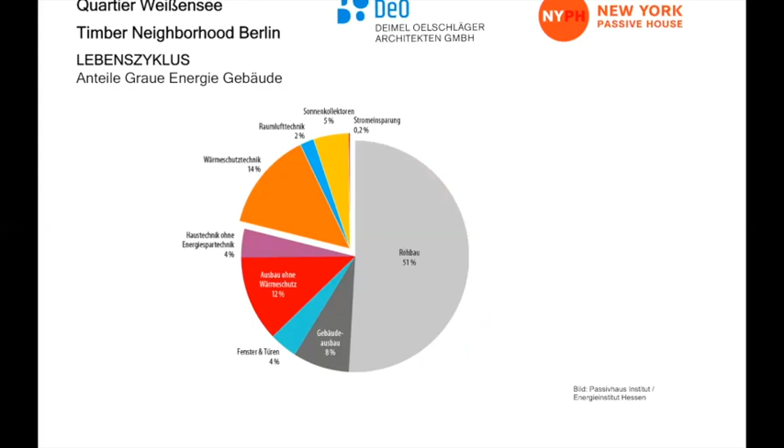And if you look now inside the building, the gray part is the Rohbau. This is the construction, the carrying structure. So from the 50% of the building, we need the embedded energy. Again, 50% is the carrying structure, and the other is divided in insulation, windows, and tech.

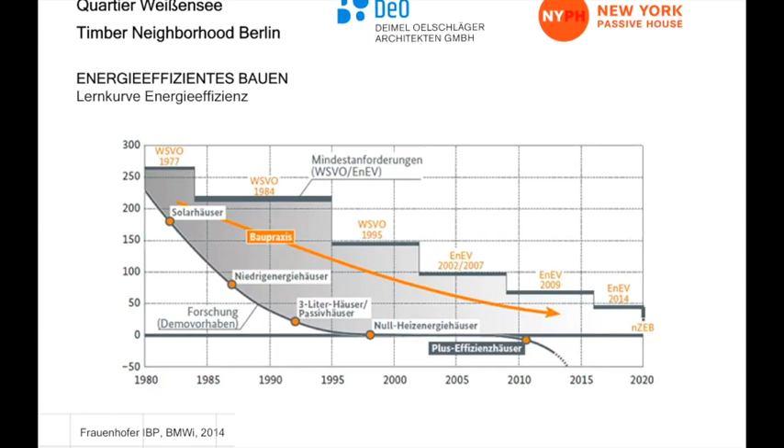And we have good financing for efficient building and very strict laws in Germany. You see on top the step that goes up. This is the law always getting harder from year to year. In the end, all the European countries have to show how they will build zero energy houses. On the other hand, there are research projects like Niedrigenergie, Nullheizenergie, or plus energy houses. And the arrow in the middle shows that building practice, how the buildings are constructed, is exactly in the middle between the law and the so-called Leuchtturmprojekte.

And now we have to bring down our carbon to zero by 2050. We are in 2020. And again, you can see in the middle on the red line, the Gebäudesektor, this is the building sector. This is 40% of the emissions. This is an enormous part, and this is what we're treating as architects or planners.

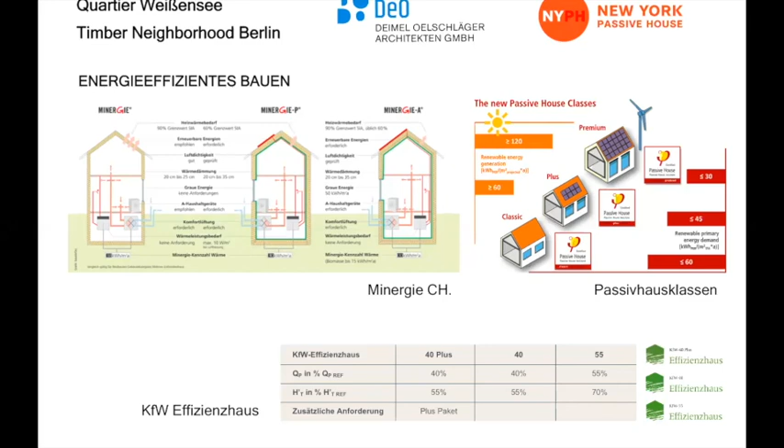And in the middle, Minergie CH, this is Switzerland, they already had a level called gray energy, graue Energie. So if you kept the minimum level of 50 kilowatt hours per square meter a year, you get the best financing if you reach this aim. And this is what we are focusing on now in our work.

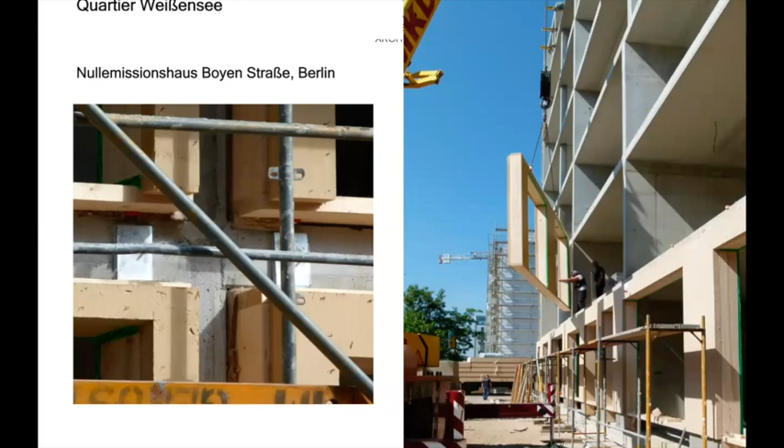And the next level is the first plus energy house we created. This is a Baugruppe, we call it in Germany. These are private investors that start organizing the building process for themselves. And plus energy, in this case, means we had to put solar panels in the facade. This was the first time we did it.

And it also is a wooden construction, which was not really easy because of the fire protection of the solar panel in the wooden facade. You also see this is prefabricated wooden panels filled with cellulose fixed to a concrete construction.

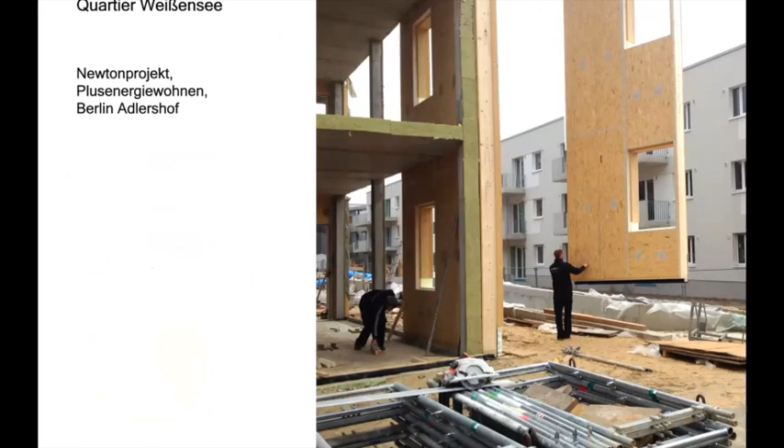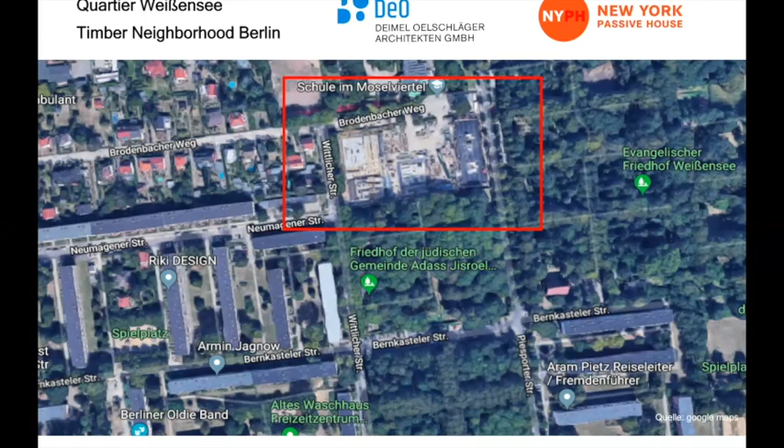And the investor found an old Jewish cemetery that is no longer used. He bought it and got the permission to build there. It was a competition with 10 invited offices, and we were the only one to suggest the wooden construction. So we got the contract to build it.

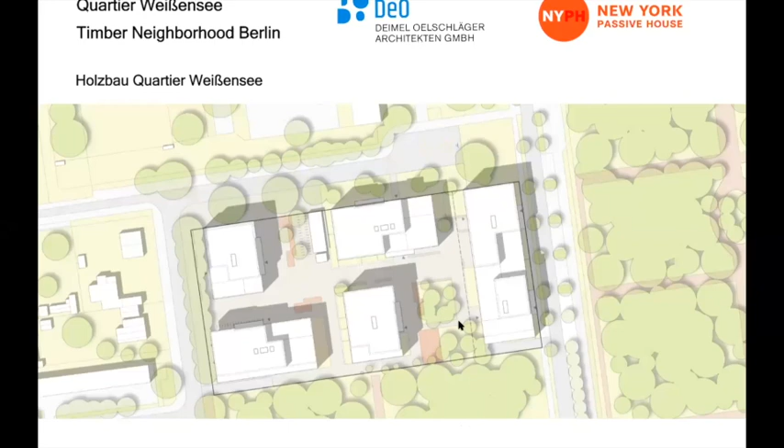And this is mostly the end of the urban development. We built 5 houses. They are between 4 and 5 stories. And 4 of them are for a cooperative, and the other one is, how it's called, self-owned, Eigentumswohnungen. And we built two yards. The first one on the left is an open space with communal services, and the right one is a green area with a playground for children, and it's connected to the rest of the Jewish cemetery. It's a green area.

So these are 2 slides for the facts. How big is it? What are the basic numbers? So we built 12,000 square meters area of use, and it's a mixture between living and open services. This is the KfW level we reached. And the price is quite interesting. This is 2,090 euro per square meter, and in total 24 million euros.

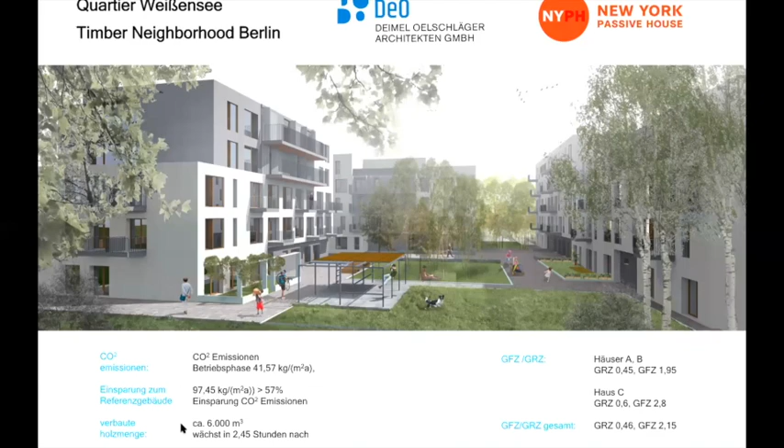And this is the slide for urban density. We suggest to make the houses up to 5 stories, but half of the area is covered with building. This is a GRZ of 0.46. And the whole plot is 2 times covered with Geschossfläche, living area. And this is the condition to minimize to zero emission by the standard KfW 40. So this is apart from the competition we have on the first area. This is what we should build. So the maximum of floor area.

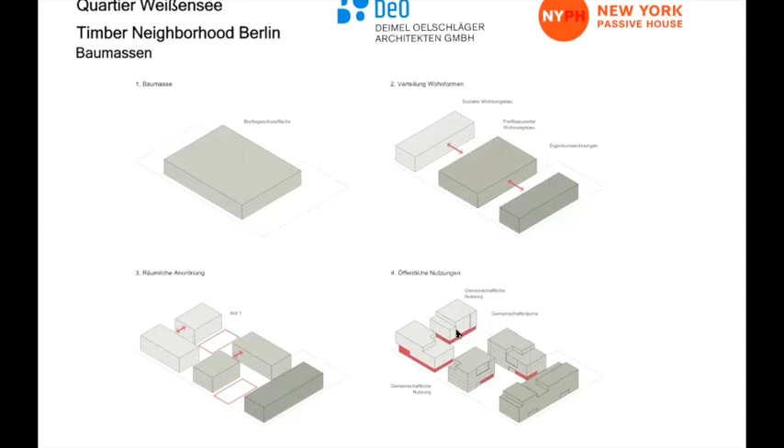And we show the idea, it was almost a third social housing, a third rentable housing, and a third self-owned housing. And the next shows the idea for the urban form, to create these 2 public spaces between. And on the slide, the fourth is the public services, how they are located in this little area. And we put them on the front. This is the most public area with the urban spaces, and the deeper we go in, the more privacy we have.

There are some special features for living. We call it cluster. So this is like minimum apartments together in one flat, and it's for refugees, for example, from Syria. So we have 2 units with refugees. These are young people coming back from drugs, living together with a social worker and so on.

And again, the yellow are the areas where there are social services. We build a pool, a little bar. There's a kindergarten, and the other house has a restaurant. So there is a cooking, mostly a public cooking for all the people that live in this area. The idea is to have communal living in all kinds of living conditions. You are rich, so this is your own flat, and you are depending on social money, so you go to a social housing.

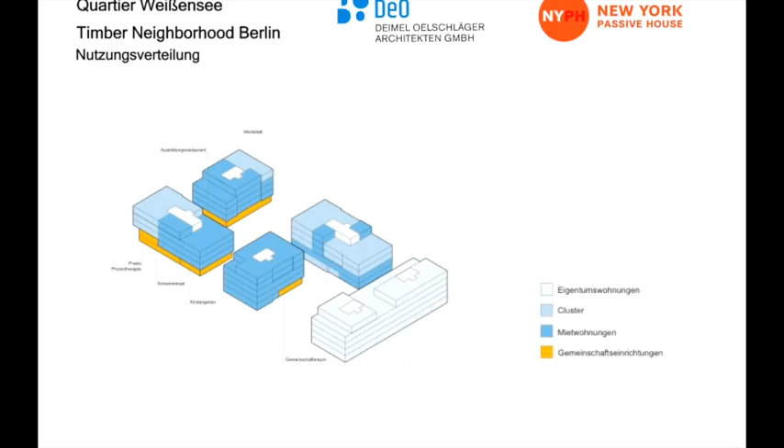This is the plot from the landscaper. Unfortunately, we had a lot of area to cover for the fire services. They have to get to the windows. But the public space with all the services should be the meeting point, and the deeper we go in, the greener it gets.

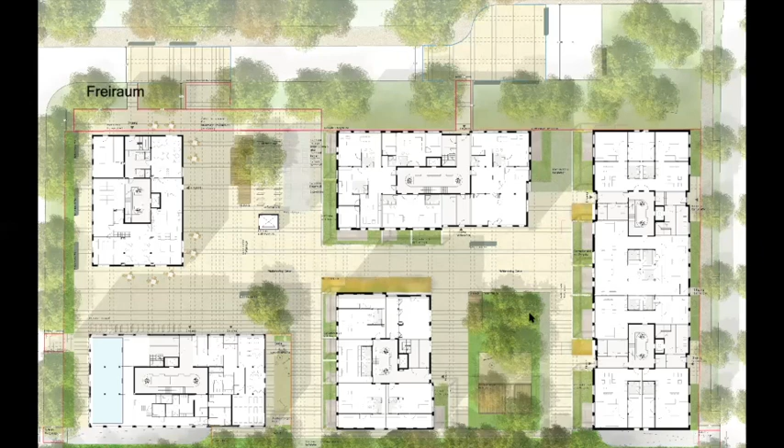This is the mostly finished housing, and you can see the organizing of the single housing. In some places they're very narrow, and this is what we really decided to do: if you have areas where it's very narrow, you meet each other.

That's the concept. A lot of people build community when they meet, and so you go through and get into the open space. There are 2 slides that show the public area around.

This is the playground with the view into the cemetery. This is how you see it from the existing Jewish cemetery into the area.

This is the public area, also with services like rubbish and cycling places for bicycles. And we built 2 garages for cars and 1 garage for bicycles, each with their own lift.

This is the one you see in the background. This is a lift only for bicycles, to go under and put your bicycle into the bicycle garage. And this is the view from the street, the ownership.

So I declared the different systems of housing, and we had to fulfill the task of showing the different types of living in one floor.

On top you see these cluster units. These are small units. They have their own bathroom and the possibility to get a little kitchen inside, but they also have a common space to use for living and cooking.

There's also a possibility for a service unit connected, so the social workers can even have an office there, or sleep there, whatever service they need.

Under this, mostly on the same plot, is a big 5-room rentable area. We decided, because this was the task from the competition, to make the construction like a skeleton. So we have different axes.

One axis is in the facade, which is very narrow, 2.80 meters. And the one inside the house follows the line of the staircase, it's double, 5.60 meters.

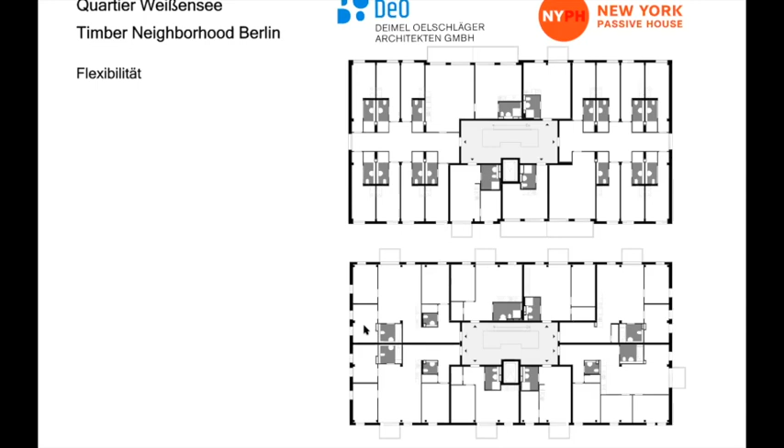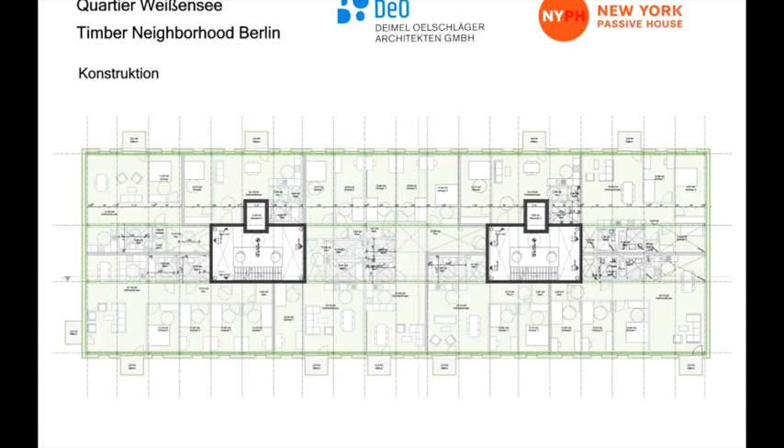So the decision to make a skeleton comes from the need to show, inside the same construction, those different types of living. This shows the basement floor plan of the biggest house: the black lines are the concrete part of the house, and the green is the wooden part.

And if you see it in section, it becomes more clear. This is the garage for cars and private storage, the staircase in concrete is in the middle, and on the staircase the massive timber ceilings are connected.

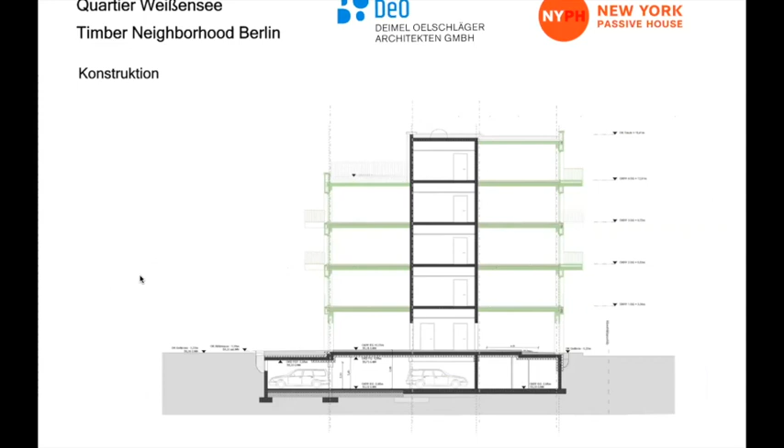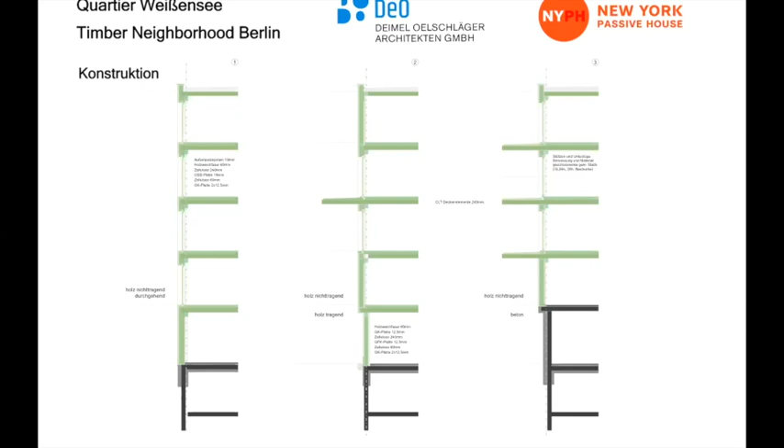So I brought some details to explain again the basic construction. We see the facade panel, which is filled with cellulose and insulation on top, and gets plastered on the outside.

Inside there's a little fire protection, so we had to reach 30 minutes on the facade. So there's insulation, mineral wool, and gypsum.

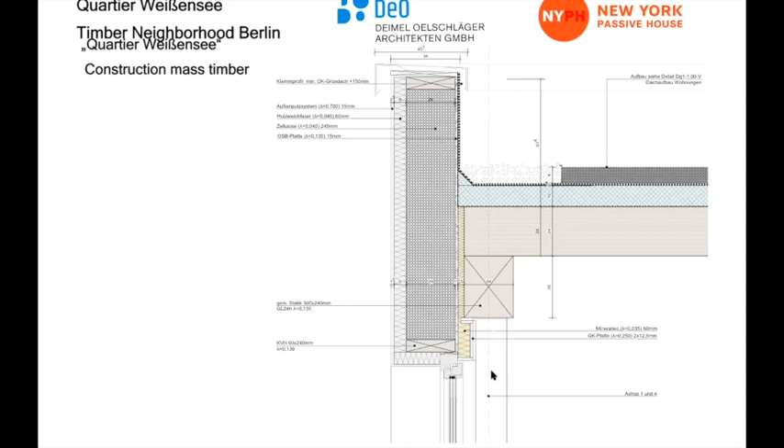The next level is the massive timber construction, the ceiling, and there's a beam going under the ceiling and the posts under that part of the skeleton.

This is again the detail of the step-back idea from the facade. Basically, it's located on top of the ceilings, and in the red stepping-back construction it becomes part of the construction.

And carrying structures inside the wall, normally it's outside, visible in the room.

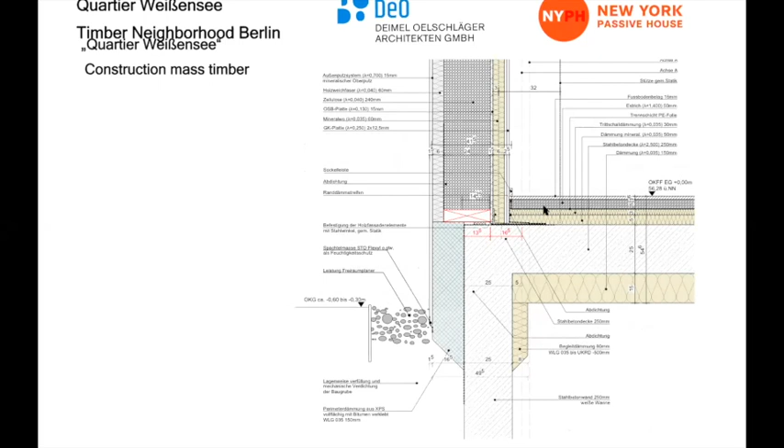This is a detail of how the construction fits to the basement. There's no insulation in the cellar, so we had to create insulation under the ceiling to keep the basement warm. What I really like about doing wood constructions is there's no question of a cold bridge.

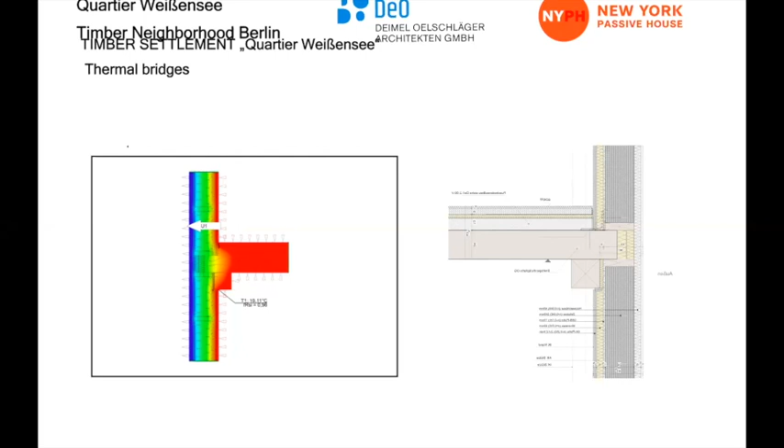If you combine the carrying structure and separate it from the insulation, you can see it on the left side. There is no cold bridge. This is very easy to reach all those numbers you have to reach.

Again, this is the detail from the normal to the step back facade. We looked for how much we need for this 10 centimeter insulation, again, to get no cold bridge in this part of the building.

It shows the development: the concrete staircase in the middle, then the carrying wall from ceilings and posts. On the front, the facade is only the protection for weather. It had no carrying function.

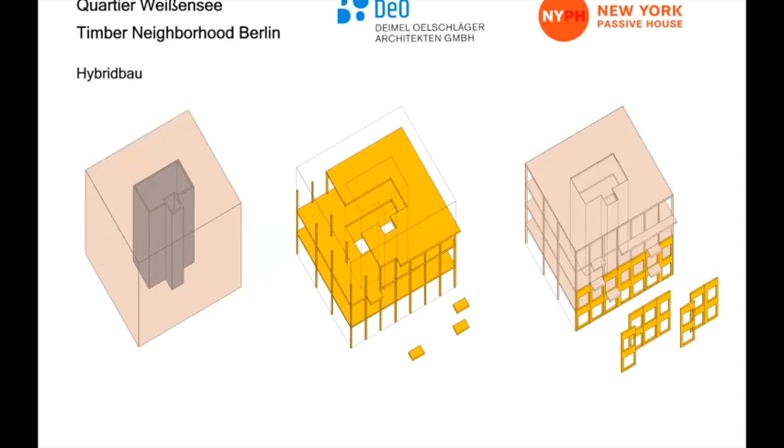Because we discussed in Germany getting better financing for sustainable material, we looked at how much of the construction is made in concrete and how much is in wood, and it is 30% concrete to 70% wood in the volume we built.

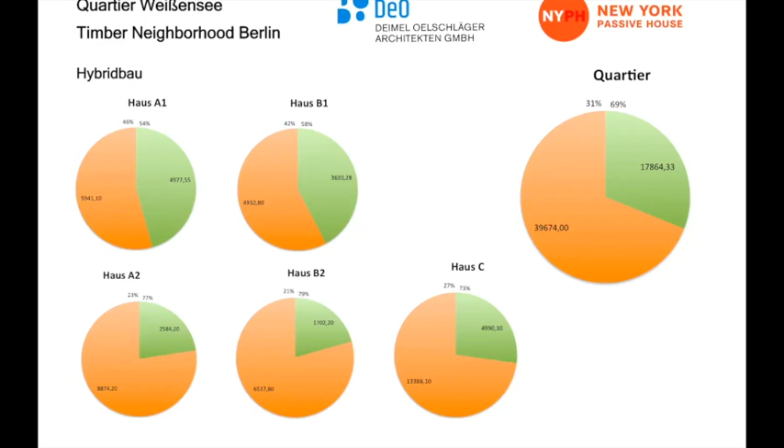I was very astonished about it. I never thought that so much is wood. Even though we did the swimming pool in concrete, we have 2 garages for parking.

And if it had been built in Munich, 20% of the whole amount of the project would have gotten financing, in case it would be built in Munich at that time.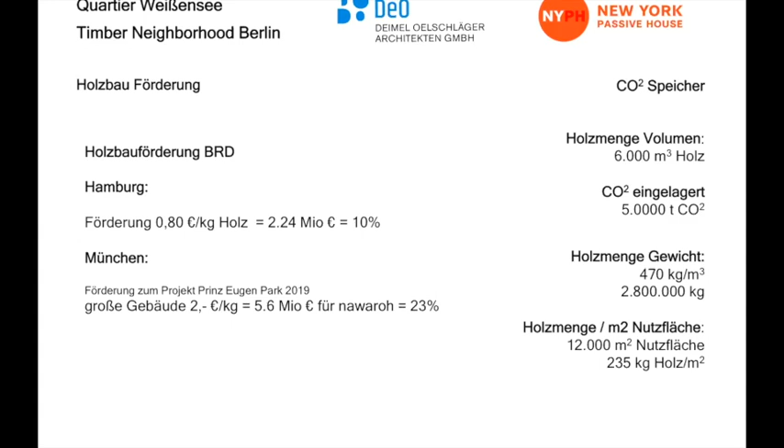But we are in Berlin. Berlin is poor, there's no money. I'll show you pictures from the building site to understand the construction, how it developed, to build up.

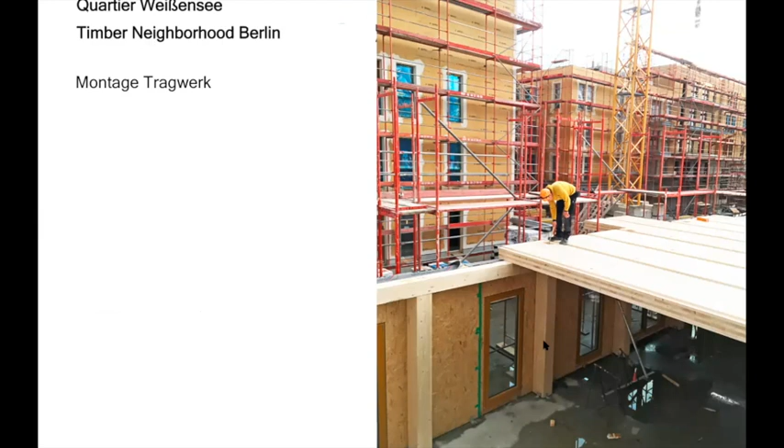You see the basement is the facade in the basic construction, and the carpenters just bringing out the wooden ceiling elements. In some cases we have steel beams because the wooden beams would be too big in size. This is the normal way the construction will look.

This shows the end of the basic construction. So everything you see in mass timber will be visible in the end, and only the facade, this is OSB,

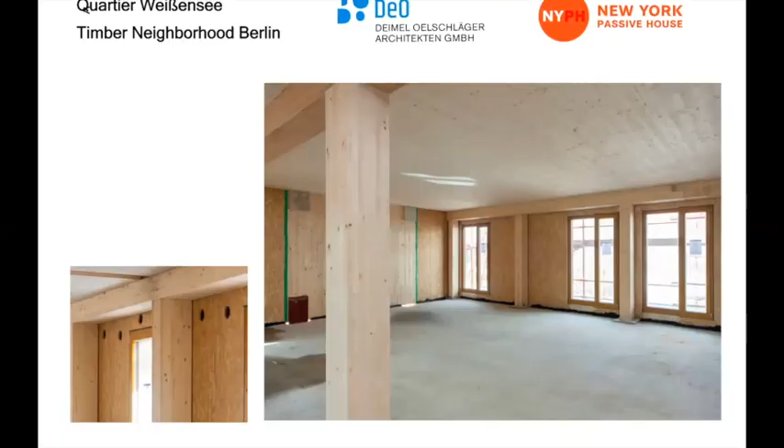will be covered. Building in wood makes you have very, very clear building sites. There is no rubbish, no waste, and what remains, the carpenters take and put in their oven

in the night. And you see the staircase in concrete and the different steps of the raster, the facade one. This is the narrower one and the wider one in the middle.

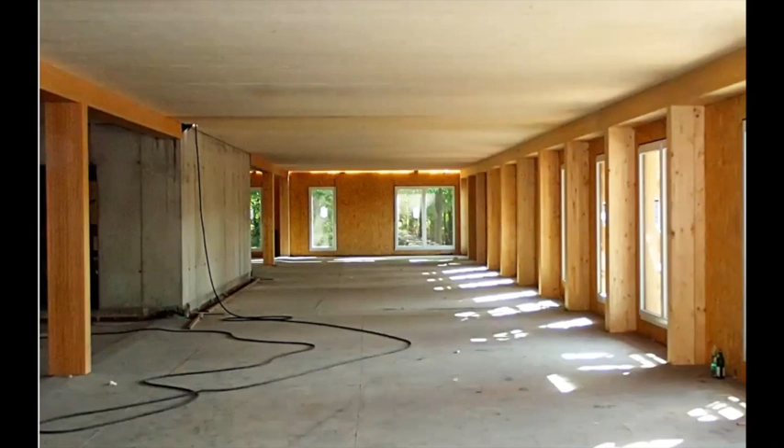Sometimes I thought this was the best situation in the building, but we have to create flats, and it's not like a factory or a big office. So the rooms only get constructed in this gypsum.

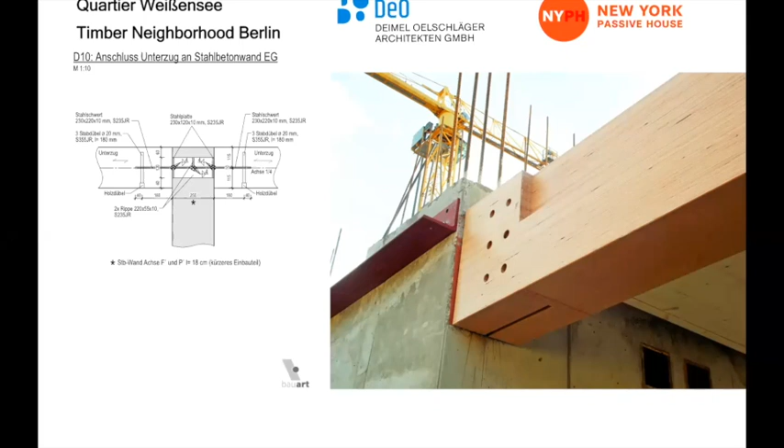This is to connect the wooden beam to the staircase. And to get the carrying structure through the beam, there's a steel construction to get the weight from the top to the steel underneath, because the wood cannot carry horizontally, only vertically.

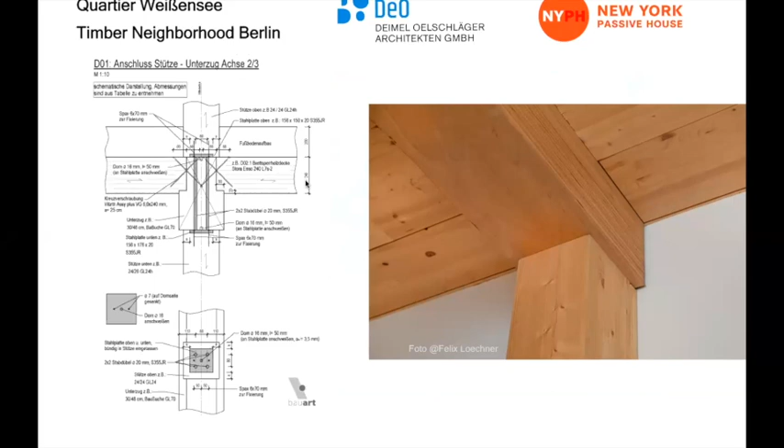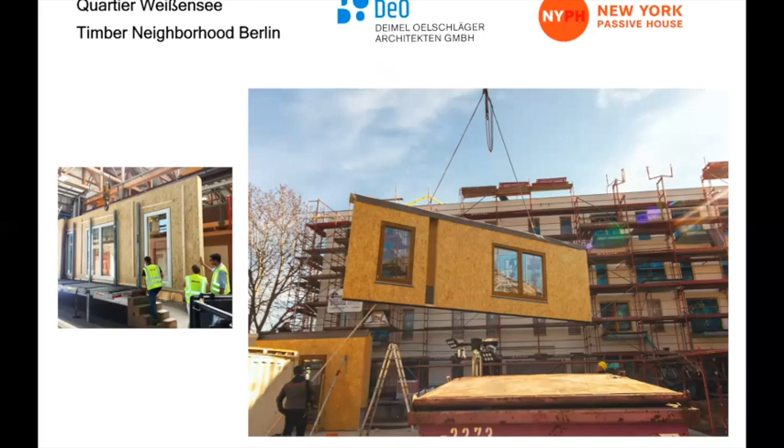This is from the company, how the pre-construction works. This is the finished element. We put the windows inside the prefabricated element, and so it very quickly goes to get the building closed and have a dry building. There's no water, and we don't need any drying work after finishing the construction.

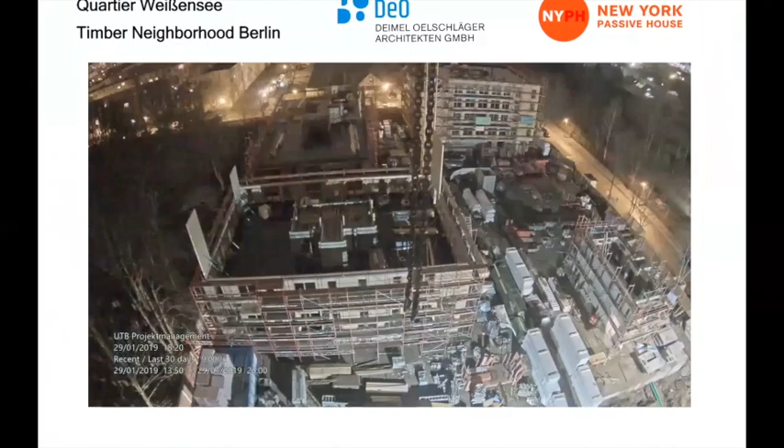So these are 5 buildings, and they are built like in a circle. The one stair is just finished on the right side. You see the A1 with the pool and the little B type, and how the work is going.

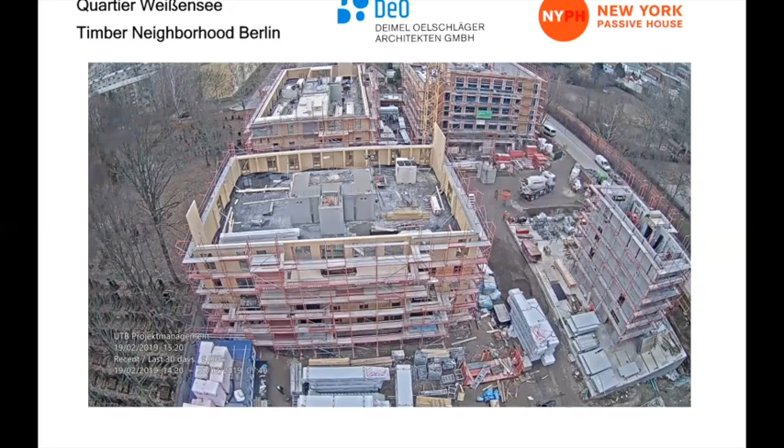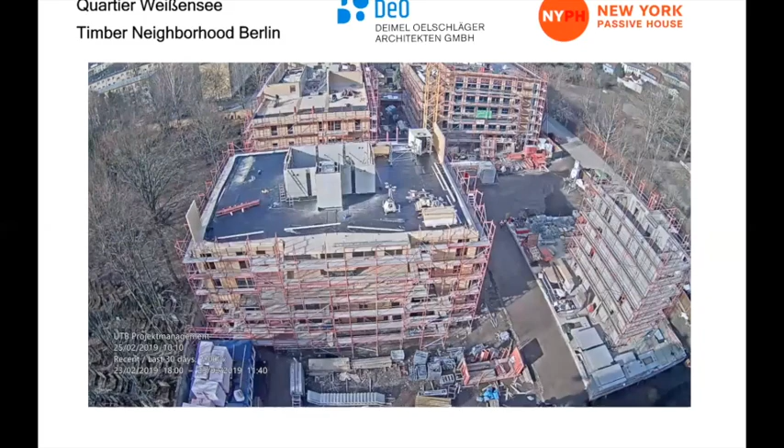They build out the construction, put on the ceiling, and the next level of elevation in concrete is built up. What happens now? So altogether, with the pool and the restaurant and everything, we need 2 years to build these 5 houses.

This is the finish before it gets plastered. We call it a Richtfest. And we start to build out now, to put in the apartments.

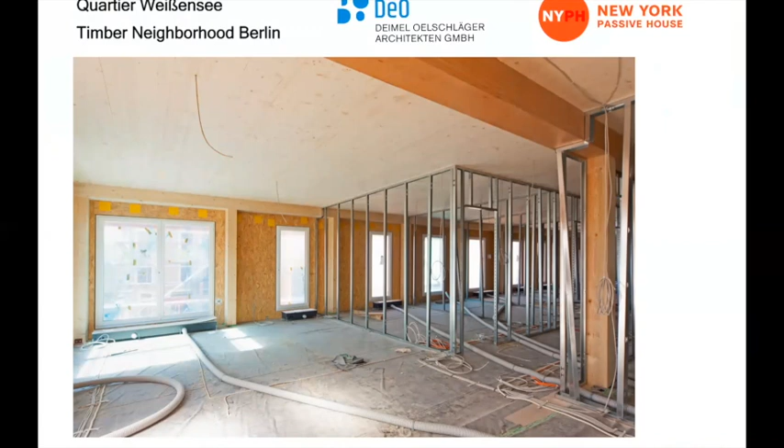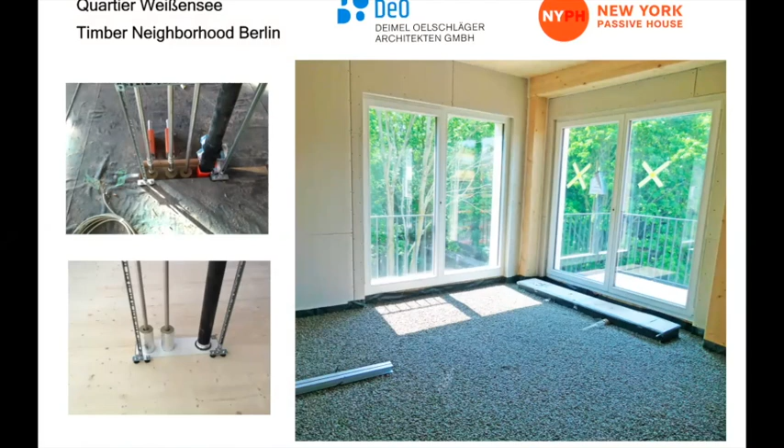We had a developer, we had a lot of visitors on the building site, and the developer said, why don't we have more wood visible? We need it, so we get a better price. And we said we put the wood visible where it makes sense, because this is a carrying structure. The clients could choose to lighten it up and give it a white color, so those clients just want to see the beams and the columns. And there's a maximum cost given for us to create this project.

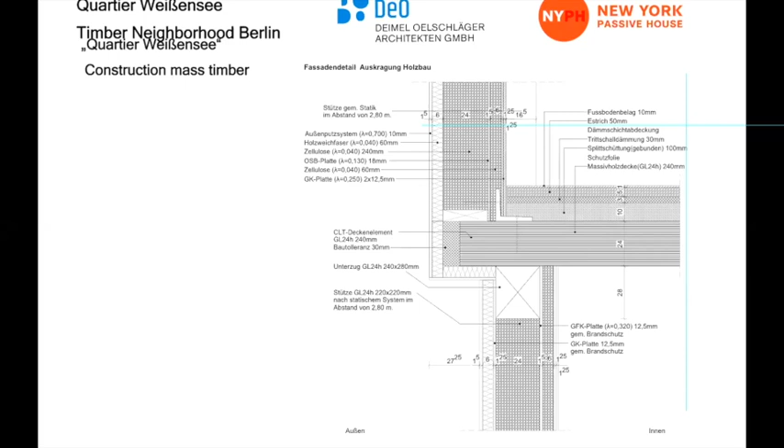And on top, this is a common noise insulation, concrete, and the wooden floor. So this is how you have to construct it for noise reduction. It's the highest level it's possible to build. And it was checked in the end and we reached it.

Were sprinklers required? Is there a sprinkler system? No. Was there a threshold? Were you underneath a threshold that would have required them? What's the point at which you might have been required to use a sprinkler system, in terms of height of the building, maybe, or area? Yeah, the permissions define levels of height. We are in level 4, and the tallest one for wood is level 5. And in level 4, the carrying structure has to stand for 60 minutes for fire protection.

And we calculated, in German it's Abbrand. So there is additional wooden construction that can take fire, and it's 4 centimeters in our construction. Every visible part of wood is 4 centimeters thicker than it would need to be just for carrying. And this is the fire protection. There's no sprinkler necessary. Sure, because of the concrete staircase.

Is there a limitation in height? Can you go 100 stories with mass timber in Germany? Yeah, it's possible now, and we had a competition finished last month for wooden skyscrapers, high-rise buildings. So we cannot operate with 60 minutes. All construction needs to be covered for 90 minutes, and it's possible. And the wood is not visible in this case. Surely not.